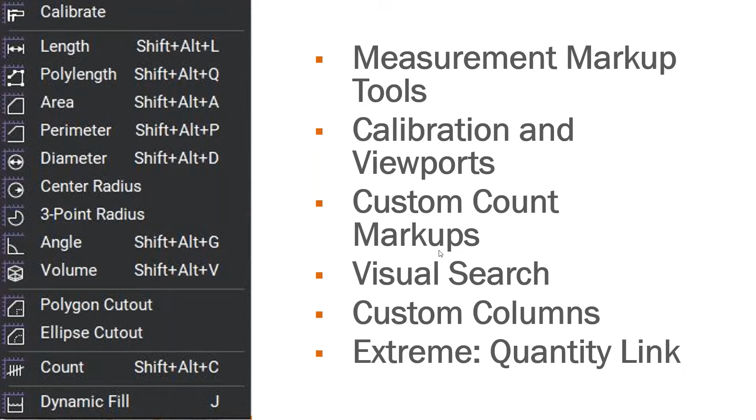Okay, so let's get right to it. I'm just going to use the out-of-the-box profile for Bluebeam. You can always customize a profile by going into the Revu pull-down under Profiles, and you can choose all different ones. I'm just going to go with the out-of-the-box one so that everyone is on the same page here. And within those profiles, you can have what's called a tool chest.

So we can make various different tools. I'm going to go ahead and make a new tool chest for this demonstration. And then I'm also going to go over what is in your markups list. Now, in the markups list, all the columns that you create get saved in the Bluebeam profile that you're going to be using.

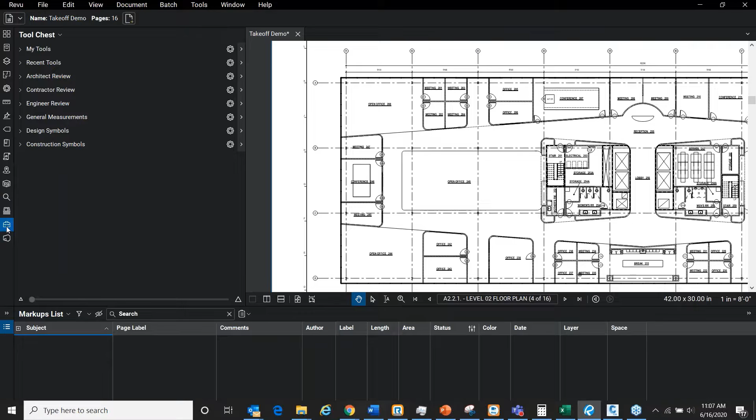So it doesn't get saved necessarily in the PDF, it gets saved in your profile, right? Same thing with the tool sets, those get saved. You can attach them to your profile as well, or you can load them up independently. Okay, so

the first thing I'd like to discuss is the scale of your PDF. Right, so there's a couple different ways to set it. A neat thing about 2019 is that if it's not already set, you can see that in the lower right-hand corner over here. If it's not already set, the moment you create a measurement markup, it's going to prompt you to calibrate the scale of your PDF page. Right? So you can see if I go to different sheets, they might have different scales on them.

And that was me lowering my markups list. Okay, so what we're going to want to do is in our markups list, we're going to want to create a bunch of measurements that we can sort and then quantify and then create a numerical, like a currency value for them, right? So we can see how much it cost to fill in these spaces, right?

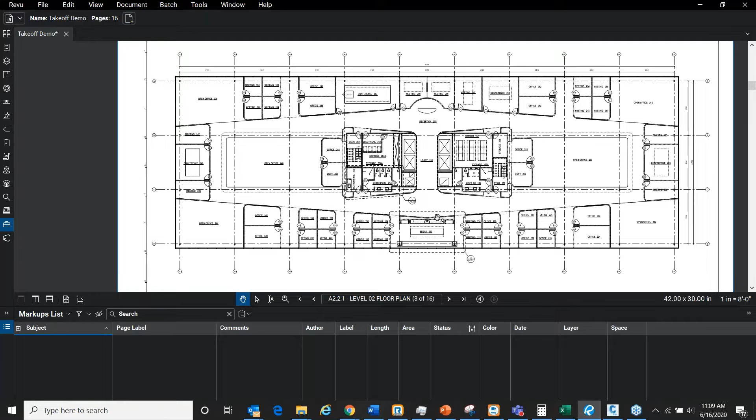So the first thing I want to do, of course, is to show you how to calibrate the page. Right now, this PDF itself does not have a written scale on it, so we're going to have to make an assumption here, and I'm just going to assume that the doorway width is 3 feet. Right.

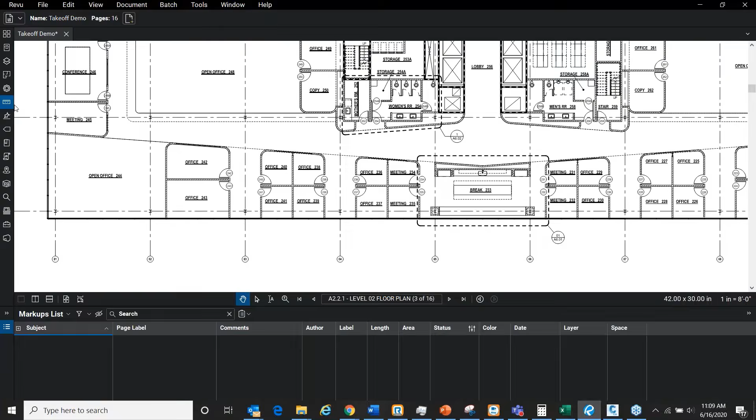So I can either click in the lower right-hand corner to change the scale, or I can go to my measurements panel, and I could choose to calibrate the scale. Now, this probably makes a little bit more sense because you have more options here. Right. So I can apply to the entire page range, as you can see in the pane here, the panel.

I'm going to choose to just set this to the current page. So it's going to be page 3. And then I can choose my precision. Right. So maybe I want it to be to every ½ inch, quarter inch, really depends on what you're trying to do. Right.

And you can either type in, 1 inch equals 8 feet, for example, or you can calibrate it, right, by clicking between 2 points, and the program is going to measure what that is, and then you can decide what it's supposed to be, right? So we can scale the PDF that way, but you can also choose what your default units are, right?

So I'm going to calibrate. I'm going to select 2 points that have a known dimension. So in this case, I'm just going to choose a doorway. So from this point to this point, notice that I'm snapping, right, to specific points in my PDF. The reason I can do that is because I have my content snap on, right? What the content snap does is it allows you to snap to any vector objects in your PDF.

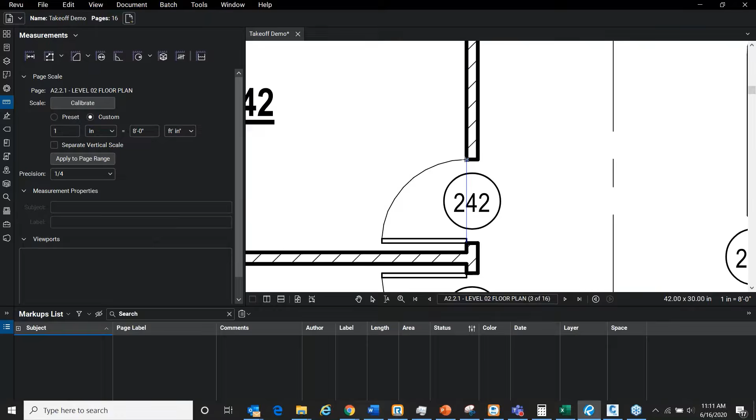Right, so it measured what that was in inches, right? So that's 0.3 whatever inches. And I'm assuming that this is 3 feet, 0 inches, right? So that's what I'm going to scale it out. I could either do decimal feet, right? I could just do it in inches or feet, inches, right? So let's do feet, inches, and it'll be precise to a 1/4 inch, right?

I'll be applying that scale to this page, right? So that once I do a measurement, snap from here to here, you'll see it measures it at 3 feet. Right. In my markups list, you see that there is a subject called length measurement, right? It tells you what page it's on. The comment tells you the measurement, who the author is, that's me.

And then you have all these other options here, right? So this tells you the length. This area is blank because it's not an area measurement. It tells you the color and the date, right? There's other things we could do. We could apply this to a layer, but we're not going to get into that right now.

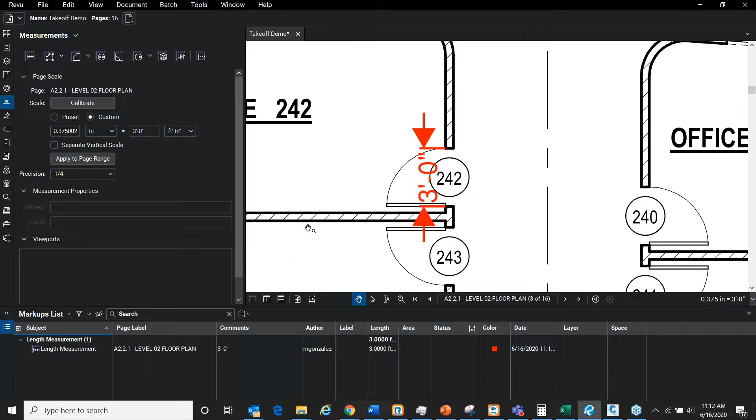What I want to do is I want to select this guy right here, right? Because we have a bunch of different options. Now, if you look at the top of your screen, right, we have these different properties. You can also go to the properties pane on the left side over here. That's the little gear where you can input a bunch of different properties. And this is true for all markups, not just your measurements.

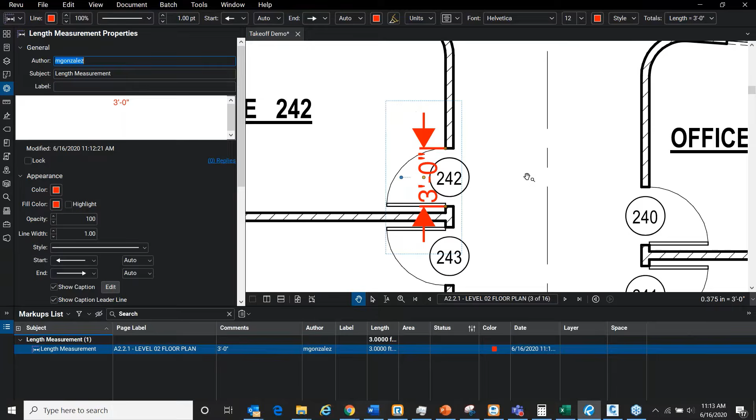So just for today's example, I'm going to do 2 examples. I'm not going to do the length because it's a little bit simple. I'm going to do areas and I'm going to do counts. Okay. So what we're going to want is to, let's say, assign some flooring to some of these offices, and we're going to want to count the fixtures that are in, let's say, the bathrooms, right? Just as an example of what you can do, and then we could tally them up and assign values for them, so we can automatically tally up as we go how much things cost.

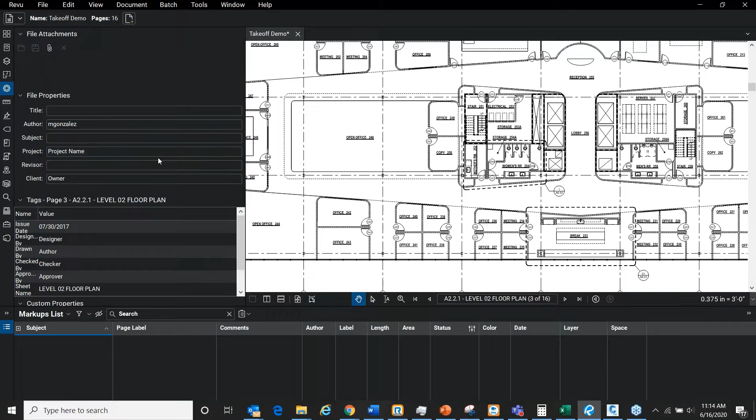Now, you can make this as complicated as you want. It really kind of depends on what you're trying to do. So the first thing I'm going to do is I'm going to create an area measurement here, right? It's going to measure this office 239, and we're going to make it appear the way I want it to. Okay, so that's the first thing I'm going to do. So I'm going to go under measurements. Now I could also go under tools, measure, area. Same thing as doing it over here. The scale has already been calibrated for the page, so we are set.

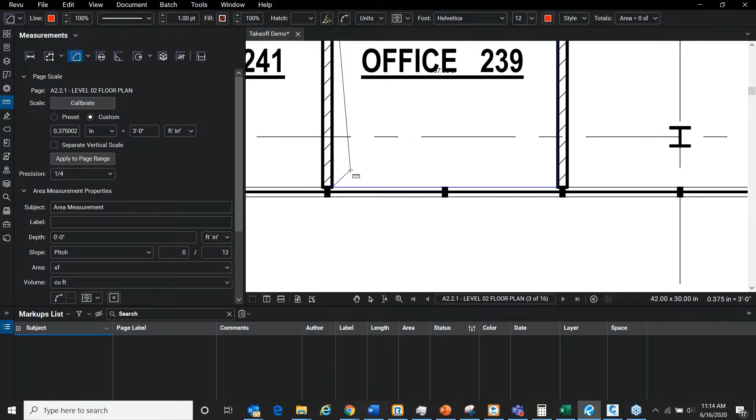I'm going to snap to this corner. I like to click all my vertices as opposed to just kind of dragging, and I press enter when I'm done. Right. So that has measured 97 square feet. And that's great. However, it's not really giving me any definition the way I want it to, or looking the way I want to differentiate it, right? So I'm going to select the markup I just made so that I can make a custom repeatable markup that measures area. So to do that, again, I can either have the pull-down menu or I can go into my properties.

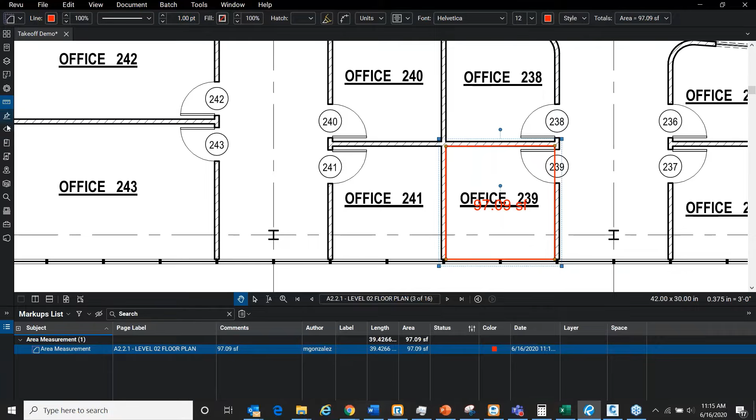So the first thing I'm going to do is I'm going to change the subject. All right, so I know that I'm going to make this space markup be for carpet. Okay. And let's say, for example, I want this color of the outside. Maybe I do want that to stay red, but I want there to be a fill color. It'll make it yellow, highlight it, so that if it's a highlight, you can see through it, right? I could choose what it shows. So I could show the caption, I can show the label, and the area.

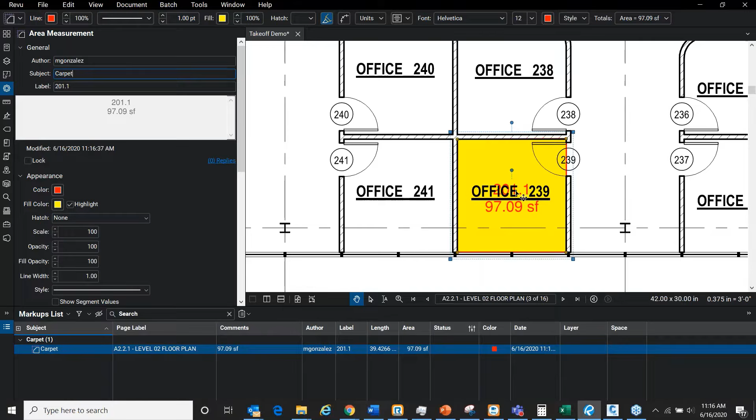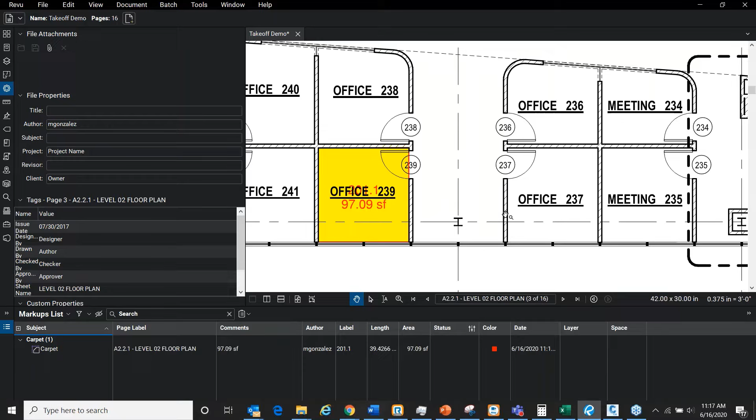So the label I can assign up here, right? So maybe I want to assign this to be a material number. So it would be maybe 201.1, okay, that's the number of the material, right? So that shows up there. And then the more information you could put in your particular markup, the better, because there's more information in your markups list. So I can make a bunch of different carpets, and they'll all show up under the subject carpet, even though they'll have different labels and they'll be different things.

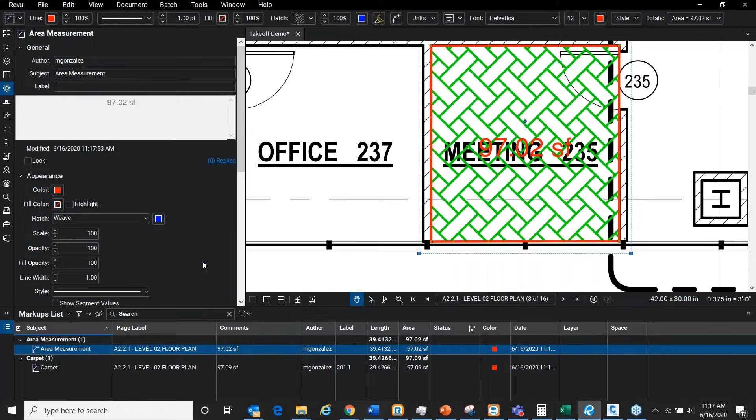So the next thing, I'm going to make another one as well, right? So I'm going to make another area measurement. And I'm going to go in this area over here just to make it nice and simple. But this time, I'm going to select this markup, and I'm going to make it look a little different. So I'm going to give it a hatch. Maybe this weave hatch, change the color of it to green. Oh, that's obnoxious. Go with blue. Also obnoxious, but that's okay. Then you can change the color of the text. So you can really customize these however you'd like.

Again, I will change the subject to be under carpet again. Now, notice that it is case sensitive. And maybe this is 201.2, because this is a patterned carpet. Now, to get these markups to be repeatable, let's go ahead and make a new tool chest that will contain these. So I can make a tool chest, manage tool sets. I don't know why they don't call it manage tool chests, but there it is.

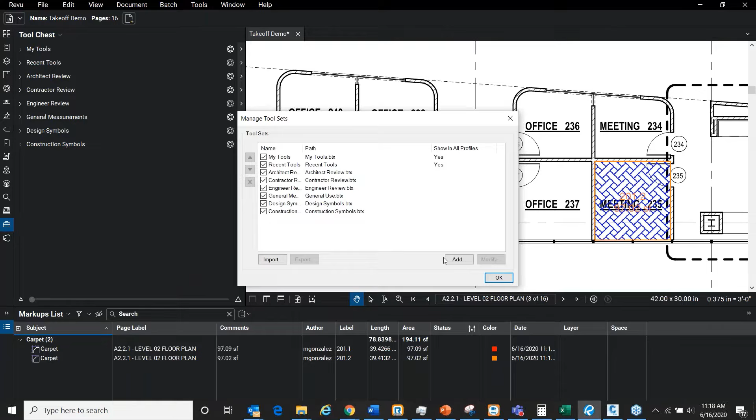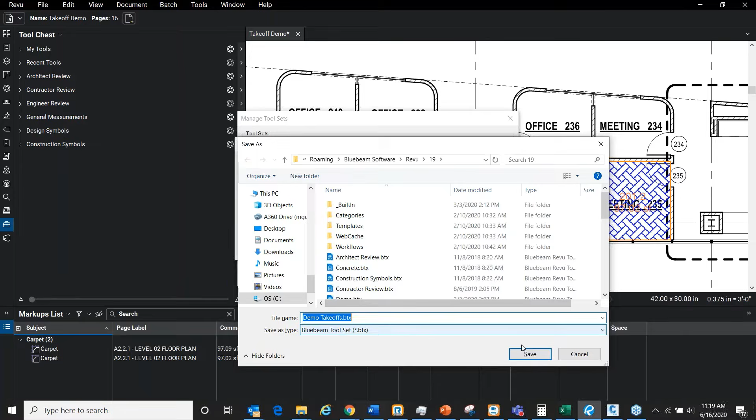I'm going to add a new one. And I'm just going to call them demo takeoffs. And it's going to save in your data, and it creates a BTX file, which you can assign to your profile, and you can have it show or not show. So here it's showing for us. You can import it, export it, whatever you need to do to reuse it. So you can make the entire tool chest, export it out, and then your users can import it and then use all the tools available with all the preset settings.

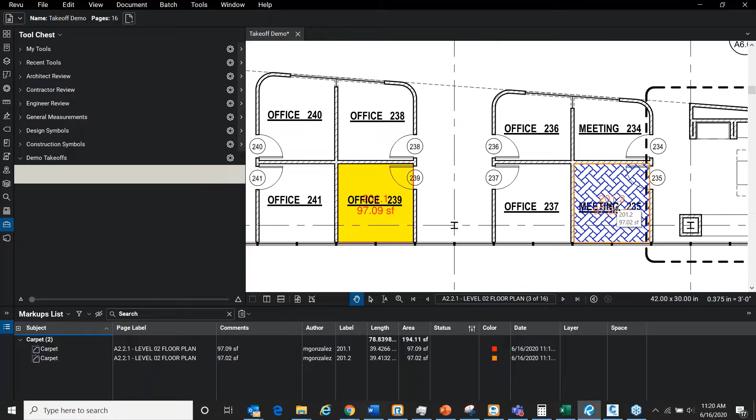So I haven't added anything to it yet, because there's a couple more things I want to specifically add to these markups to make them repeatable and useful for me. So to that end, I want to create a couple new columns that will demonstrate that. So I can make a choice: this markup is specifically for a solid carpet, whereas this markup is specifically for a patterned carpet. And they might have different prices.

So let me go into my markups list here, and I'm going to show you how to make a custom column. I'm going to make a custom column by going to Manage Columns, Custom Column, and I'm going to add a custom column. Now you can add a variety of different types of custom columns. In this example, I'm going to make a choice. This is the type of flooring. So the flooring, and it's a choice.

So I'm going to add the items. What are my choices here? Each item has to be unique. So if you assign it the subject carpet, you can only assign it a specific item if the subject matches. So I can't have something that's a different subject and assign it the same item that's under the flooring choice. So here I will choose solid. So it's a solid carpet.

And I'm going to assign it a numeric value. So maybe per square foot of carpet, a solid carpet would be, and again, I don't know at all how much by square footage, let's say it's $5.93 per square foot. And then I'm going to add another choice. So again, it's the same subject, it's carpet, but this time I'm making a patterned carpet. And we're going to assign that a value that's slightly higher because patterns are fancy. Let's say $6.28 per square foot. Again, maybe these values don't make any sense, but they're just values.

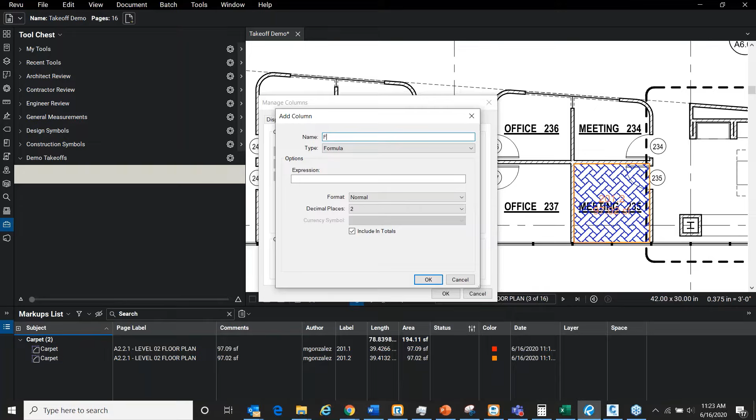Okay, so I can say okay to that. And now what I want to do is add another column that's going to actually give me a numeric value. So it's going to multiply the area times the value defined by the choice. So I'm going to add a new column, and this one's going to be a formula. So this is going to be flooring cost estimate.

And notice that there's no pull down, but the moment you start typing something, if I chose F, I can choose flooring, because it's going to choose from that subject type. Double click there. I'm going to choose to multiply that by the area, because these are all the different functions and variables you can choose. So this is going to choose the area measurement of the flooring choice. I can choose to have that in currency, in 2 decimal places.

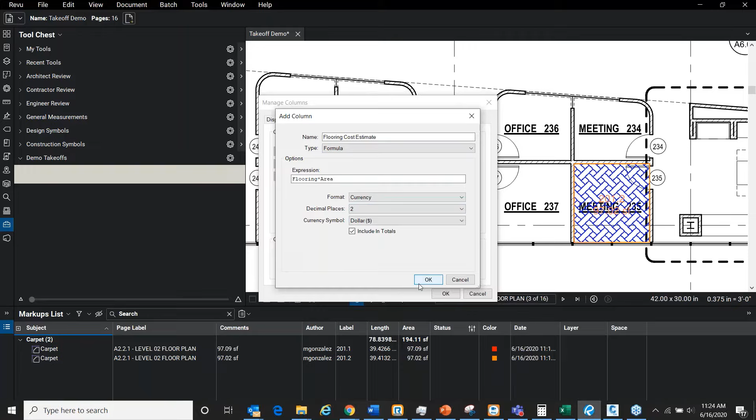Okay. So now, notice we have flooring and flooring cost estimate available to us in our markups list. Right now, I haven't assigned these to be either, so I can select this guy right here. And in the properties panel, I could scroll down, and because it has the same subject as the choice that I created under my flooring column, I can select either solid or pattern, or I could do that here.

So I'm going to select solid in my properties for this one, and notice it shows you the per value, and then it's showing you the total cost by the area. So 97 times 5.93 gives you that. I can do the same by selecting my patterned, and I can choose pattern, and that way it's going to automatically assign it there. So we have differentiating in type of flooring.

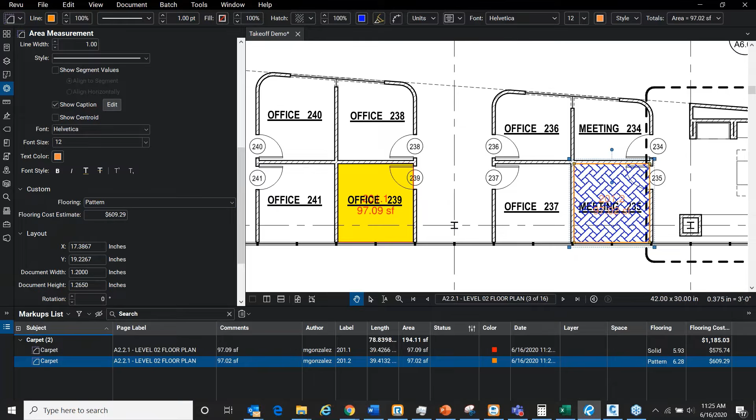But notice that we have a running total for carpet as the subject, because it keeps it all under one header. So you could do different types, if you're doing hardwood, tile. Those could all be different subjects, still using the flooring choice. You just give them different items and subjects. So you can just build it out as much as you need to. And you can do that with lengths, walls, all different sorts of ideas.

So the way I can make this repeatable is that if I go to my tool chest, and I made a new one, this has all the properties I want. It looks like how I want. It's displaying how I want. This is showing me the material number.

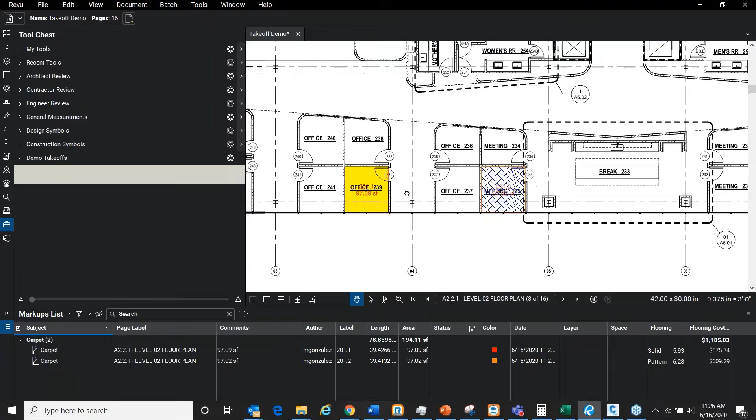So solid carpets are material number 201.1, right? Whereas pattern carpets are 201.2, for example. And if you have a whole list, you can make them match up however you want, right? So I can select my markup that is now all set up how I want it to be. I can right-click on it and I can add it to a tool chest.

So for this example, demo takeoffs, right? And I'm going to do the same thing. I'll press escape, do the same thing with this guy right here. Add to tool chest, demo takeoffs. Right now, if I click on them, they're going to make the exact same thing. I'd have to right-click and change it from there to there, right? Choose properties mode, and that way, it'll just maintain all the same properties, but I can just click, right? And have it fill in.

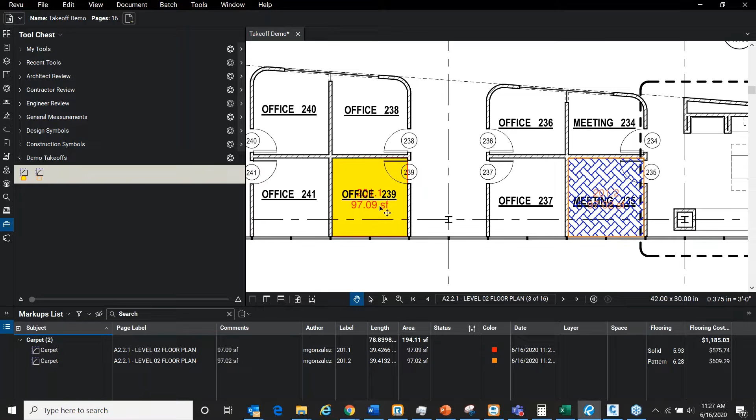So for example, if this Office 237, I also wanted to have the same carpeting as the office right next to it, seems only fair. Right. So it's all the same properties. Notice that it's down here, right? Patterned, right? And it still just tallies it up as we go. So you can just start filling in all the different rooms how you want, right? All your different spaces, however you need to.

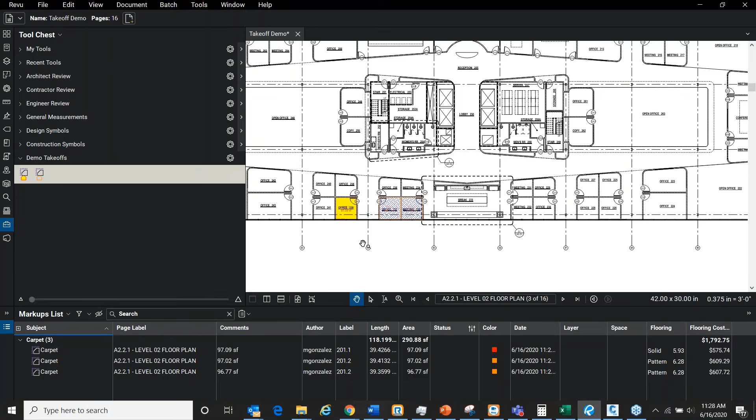With different flooring types, and it really takes a little bit of setup, but the accuracy you get by snapping and filling it in this way is really useful. Notice that we have some weird curves over here that might be a bit frustrating, right? To just kind of make the curves and all these weird angles and things like that. So one thing I want to show you is the dynamic fill function.

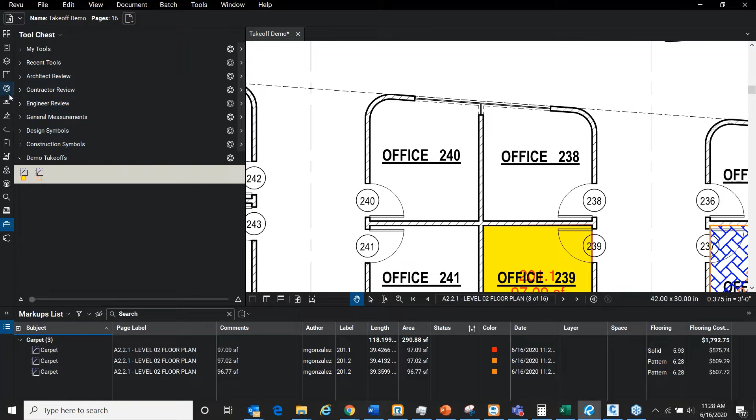Okay, so if I go into my measurements tab, this button all the way over here called dynamic fill, that's going to allow us to choose oddly shaped areas that we can define using a particular markup. So again, we're already calibrated, so I'm going to click on dynamic fill, and I get this nice little toolbar. So I can define in two ways. I can add a boundary, which I'm going to need to.

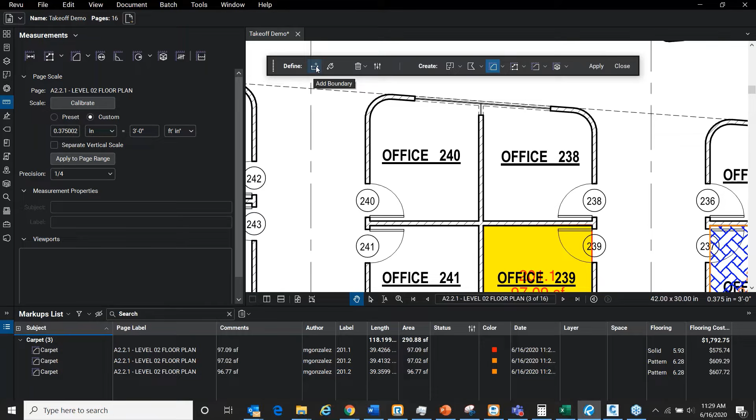So let's say over here, I want to close this doorway. So I can add a boundary by selecting this icon on the left. And again, I'll snap to this corner and close it off over here. Press enter, and that way it'll close it off. I can also change the boundary sizes, right? That was a little bit big. So maybe I'll go ahead and I can remove that, and I can redefine it just by clicking. So you can change the different sizes and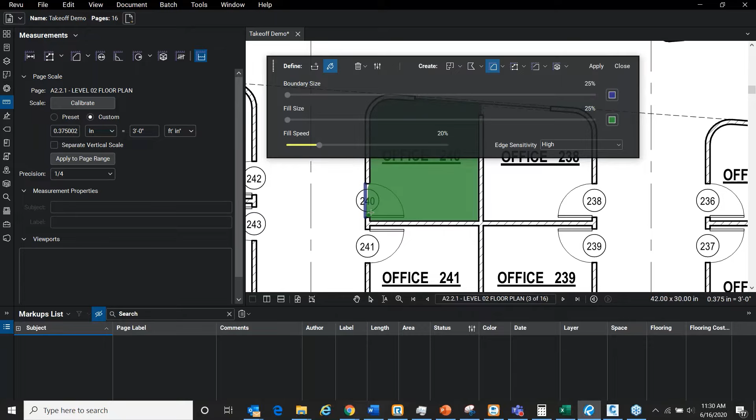widths of things, right? So the next thing I'm going to want to do is define the space by filling it in, and this is kind of the neat part. And maybe I'll change my fill size to maybe a little bit smaller. So notice that it got in all the little nooks and crannies, right? Without me having to click a bunch of times, make a bunch of weird curves and things like that.

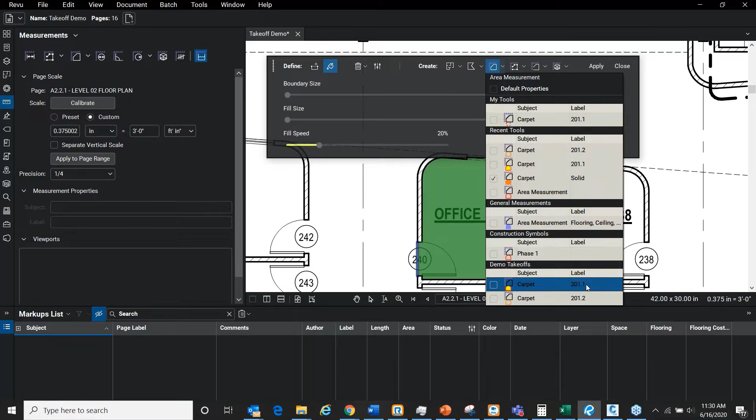And then what I could do is I have the area measurements, and I can go to any one of my tool chests and choose what I want it to be. So I want this to be a solid carpet. So I can see the label, 201.1, that's the solid carpet. So I'm going to assign that here, and I can just apply it. And see how it just got me my area, and it added it to my running tally of carpet, because again, it's all the same subject. Okay.

One other thing I want to show you regarding dynamic fill, because you could do it with a variety of different lengths. So if I did a fill and just wanted to measure the outer length, I would use a poly length measurement, and it would give me the outside measurement. So it's really just kind of a bunch of different options.

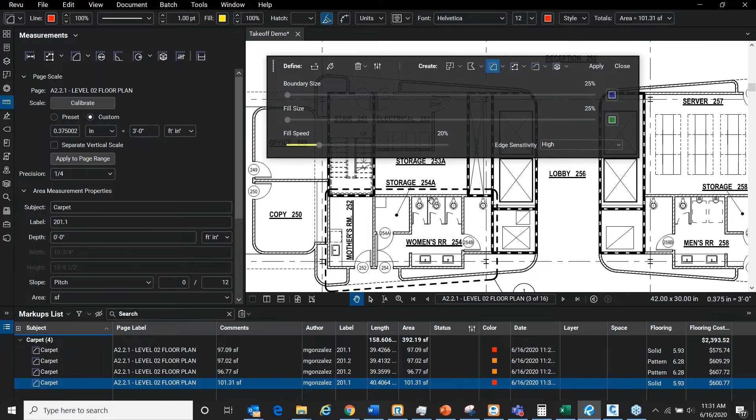One thing I want to do, especially because we're going to be using the count measurement, I want to be able to differentiate which toilets and sinks are in the women's room versus the men's room, without having to do a different layer to display them. I'm going to use what's called a space. So I'm going to create a space, and I'll call this the men's room.

And I'm going to fill in this area. So I'm going to give it a boundary from here to here. Now fill in the men's room. And you can just kind of hold it down and notice it stops over here and over here. So I'm going to fill that in, fill this in, and then scroll over here and just kind of fill this in as well.

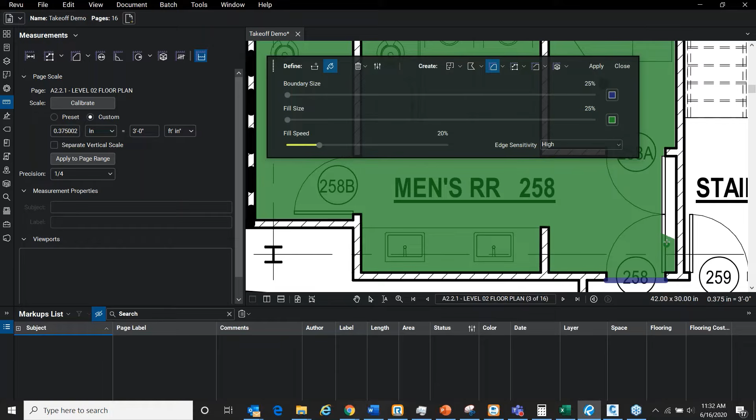So you can just kind of paint the area you want it to fill. So anywhere that's enclosed, you will fill it. So maybe this closet too. So everything inside of here is in the men's room. So I'm going to make it a space.

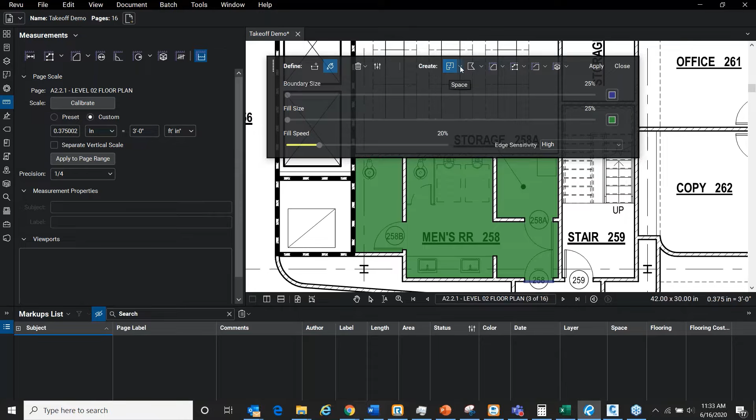Yeah. Apply that. Got to check it on. I'm going to uncheck the area measure by declicking it because I don't necessarily want to measure that area just for the time being. I could if I had a different flooring type that I wanted to apply. But right now I only want to apply a space, and it's going to be the men's room. So I'm going to apply, and it's going to create a space. Notice that it's a different color.

All right. I'm going to do the same thing over here in the women's room. But I'm going to change the color. Maybe make that whatever color that was. Same thing. I will apply a boundary to the door. Okay, and then I'll just fill in over there and over here too.

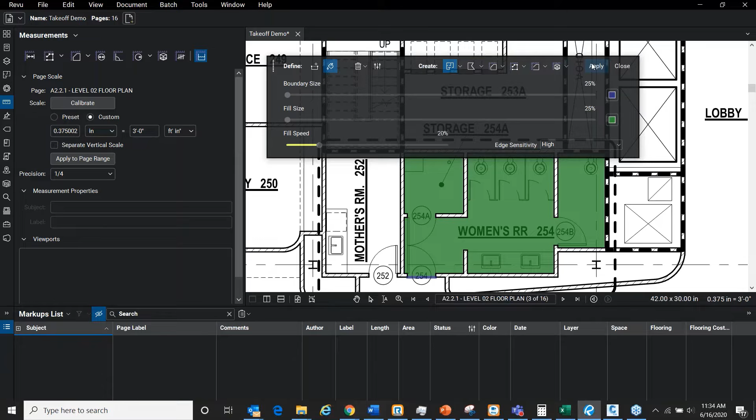Okay. All right. So it's set to create a women's room space. It's checked on, and I can apply. So it created women's room. There's the men's room. All right. So that's how the dynamic fill works. You're going to choose a different measurement type markup, define the space by filling it in, closing off the boundary, and creating the markup or space that you wish to define.

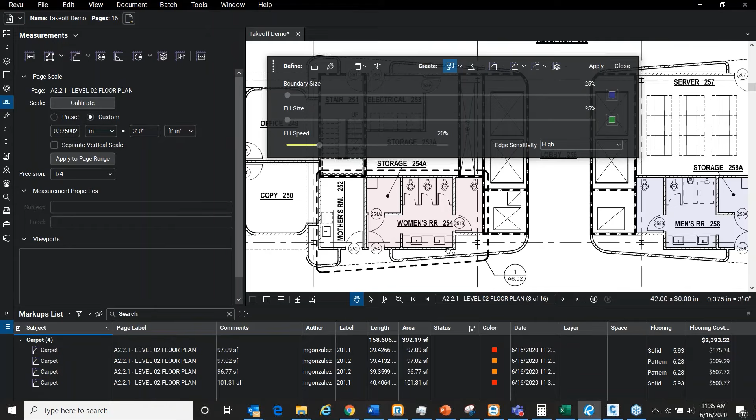Very useful, especially if you have a bunch of weird angles or curves that you don't want to manually input. So I've done that. I can close. So we're starting to build this thing up nicely. These aren't in either of the spaces, so they're not assigned to it. So let's go ahead and do what I was mentioning, and that's counting the different toilets and sinks.

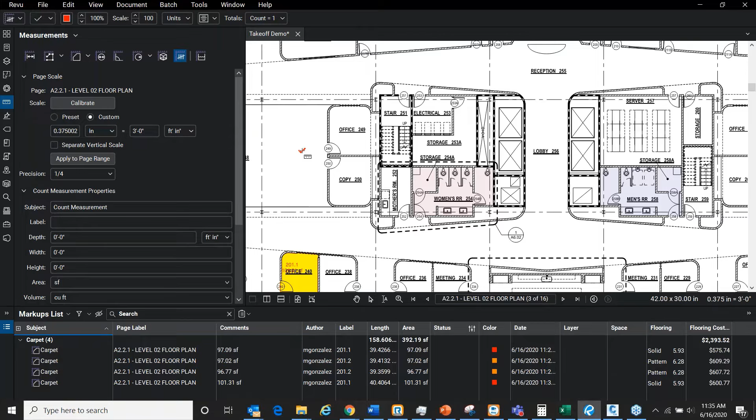So I'm going to create what's called a count markup, and now I'm just going to do it quickly using the default count markup, and then I'm going to change its properties. However, you can always either draw in your own markups, let's say like a line or something like that, or you can bring in a little image if you want and use that. So, for example, if I chose an image, just place that there, just that little guy. I can actually apply it and use it as a count.

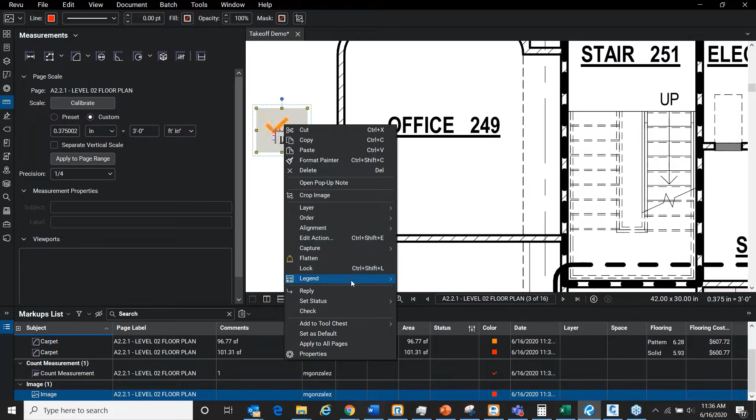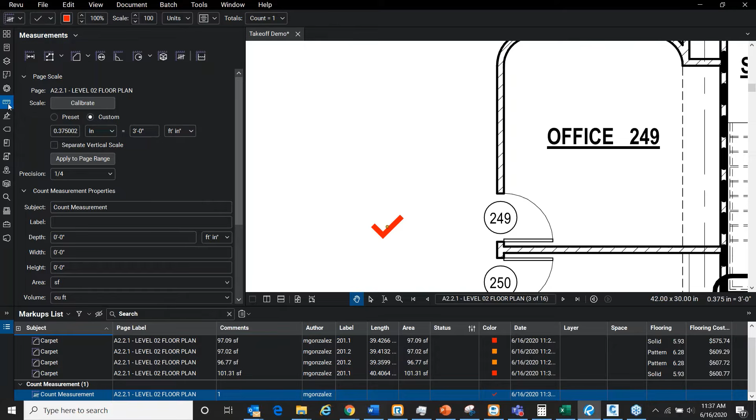So once I create more counts, I can show you how to do that. So let's say, for example, this count measurement. I'm going to remove this for the time being. This count measurement, so it's a count. I'm going to go into my properties here. And this time, I'm going to make my subject for these different counts a fixture. And I'm going to make new columns. So I'm going to call this fixtures.

And then let's say the number is 202.1 for toilets. And then I'll make the other one 202.2 for sinks. So I need to make the columns first so I can assign values. So again, I'm going to go to markups, list, manage columns. I'm going to make a couple new columns. So this one will be fixtures as opposed to flooring. I'm going to again make it a choice. And I'm going to add the item being toilets under the subject, fixtures.

Oh, and I forgot to assign it a number. So each toilet, for example, let's say it costs $125.75. Again, no idea if that's a reasonable number. And then I'm going to add another one. So this one will be sinks. So this again will be under the fixtures subject. Again, I keep on forgetting to assign the value. There it is, 78.68. So I've added those two right there.

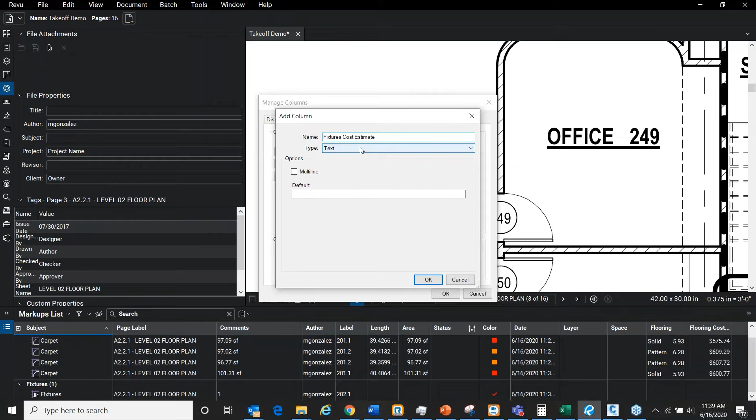So fixtures is the name of my choice. So I could add another column. Fixtures cost estimate. And it's a formula again. So it'll be under fixtures instead of flooring. Multiply it by the count, because we're doing per unit. We do currency, keep the decimal places at 2. Cool. Include it in the totals.

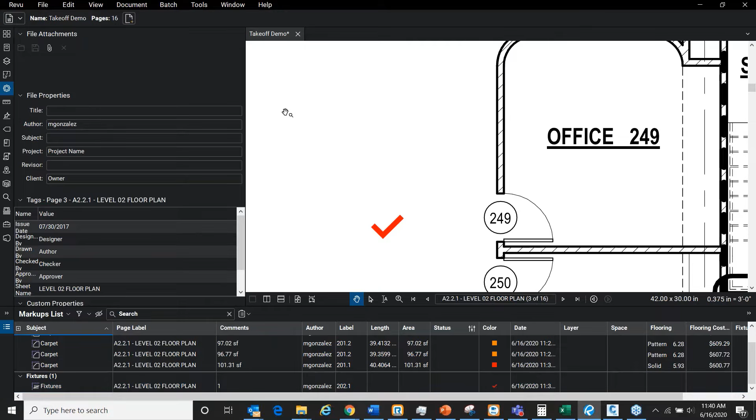Okay. So then I can go choose this count. I can change what it is, or I can choose whichever count type I want to use. So again, if I brought in an image, just place that right there. If I change the subject to fixtures, maybe this one.

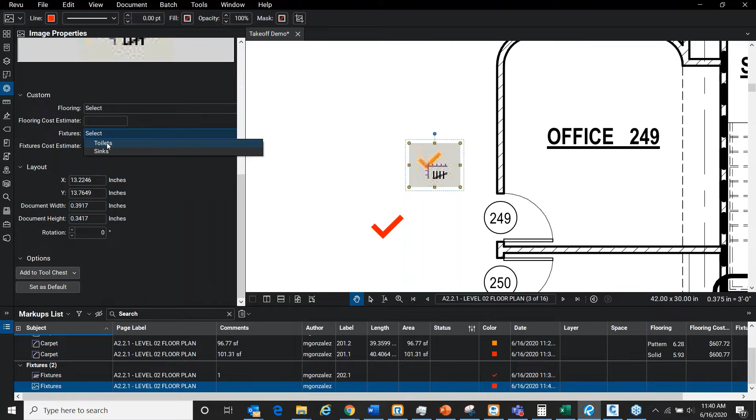Notice that because I changed the subject to fixtures, I can't choose the flooring because that would require the subject carpet. So let's say this one is for toilets. And I could change the color if it was just a regular one. But this, since it's an image, that's what it's going to be. Let's see, and I could add this as a count.

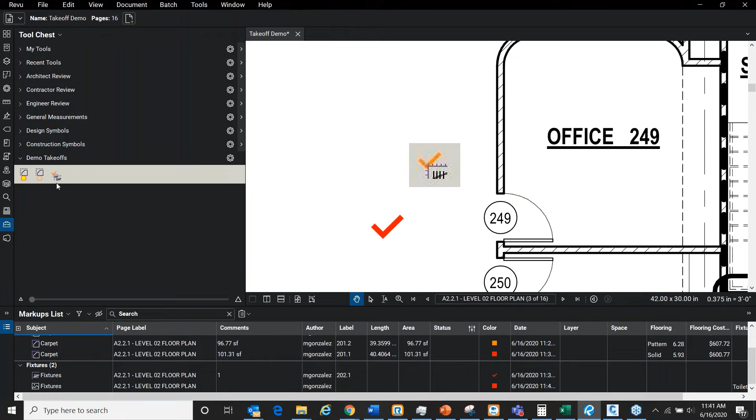Right. There it is. I have to add it to my tool chest, and then I can create a count. So I can remove the original image, and here I have a count measurement that's ready to go. So I can delete this.

And I can further assign properties if I wanted to this count measurement. So now it's a different one, so I've got to rechange it. So I'm going to go back to fixtures and reassign it as toilets.

So just FYI, if you create a count, and you click one and then you realize, oh, I've only clicked one and I want to continue, I could resume the count and keep on clicking.

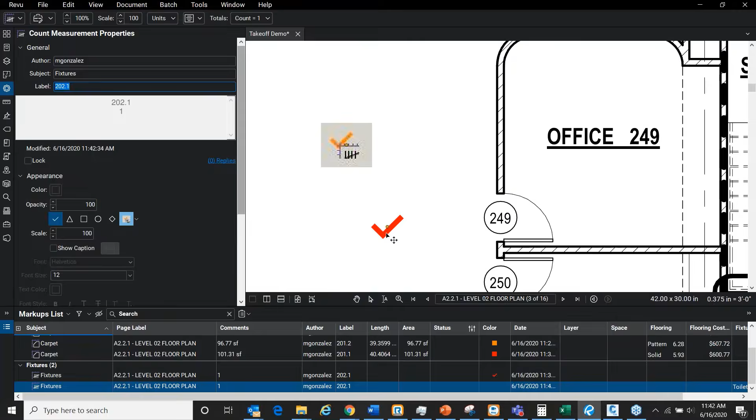So I'm going to go ahead and change the label so that it's the material number. So it's 202.1. And I wanted to change this one to 202.2 so I can assign it to be a sink. So this is 202.2, this is 202.1.

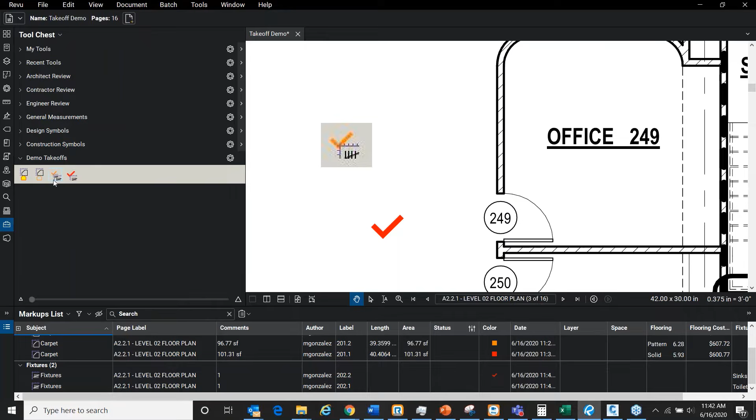So I'm going to add this to my tool chest. I'm going to remove this one again, delete it from there, and now that I changed the properties of it, I'm going to add it back to my tool chest. So I'm going to delete this for now, and delete this one for now.

And so what I'm going to do is, I want to automatically search in my PDF for all toilets on this particular page. So to do that, I can go to my search. And there's two things you could do. You could do a text search or a visual search. And I'm going to show you the visual search here because it's pretty neat.

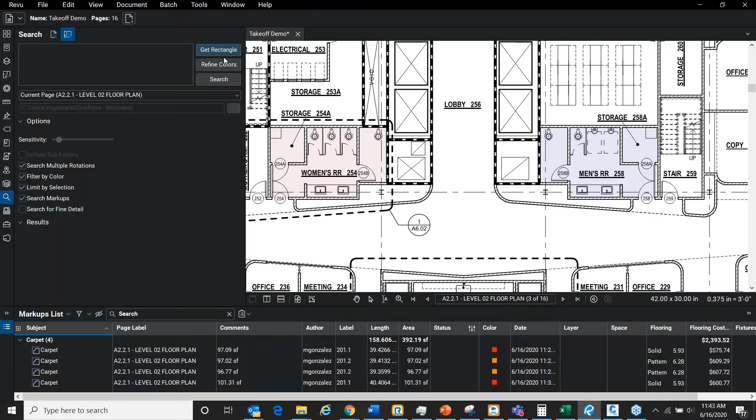So I'm going to choose the current page. You can do the entire document if you want, but I'm just going to go for the current page here. Now I'm going to choose Get Rectangle in my visual search. I'm going to zoom up over here. And I'm going to find that.

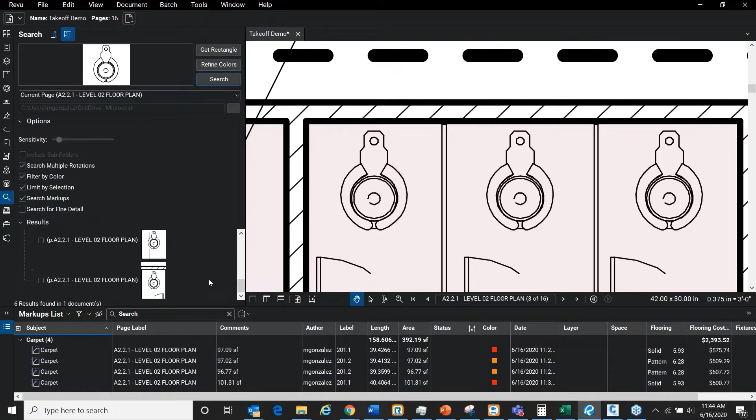So it's pretty good at knowing that it could be in any direction, any color. So you can change the sensitivity and search for multiple rotations, so it could be looking in different directions. So lots of different things you could do. So I could search. Notice that down here, it's searching this particular page. Again, I could have gone to the entire document and see how it's going down there.

So I can choose all of those instances, because if I click on one, it's going to go find it. So I'm going to choose all of those instances, and I'm going to apply by choosing that little lightning bolt with a down arrow. I'm going to choose this 202.1 because I know that is my toilets. And I applied a count measurement for all of those.

So if I scroll down here, notice that it found 6 total, but now it's split it up. So we have fixtures here, because it knows that these 4 are in the women's room and these 2 are in the men's room. So it was able to differentiate that while still keeping the running tally because it's still all under the fixtures subject.

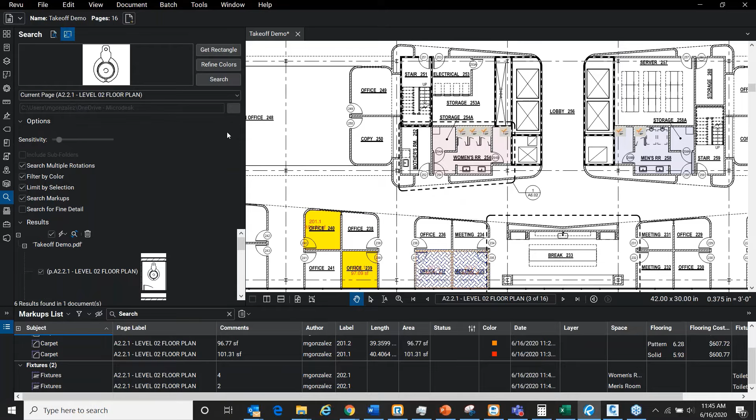Again, I could do the same thing, but this time I want to do it with sinks. So hopefully it'll find it even with that line through it. Okay, so I found a few sinks. See how they're rotated, not having a line through them. So I'm going to find that, and I'm going to choose Apply.

This time I'm going to use 202.2. And I found that one there as well. That's not in the space. So again, I can scroll down. So I found the one that's not in a particular space, if you wanted to put all spaces.

Again, it's differentiated them. It tells you how many there are in each one of these areas. But again, it keeps a running tally for all fixtures, just as we had a running tally for all carpets.

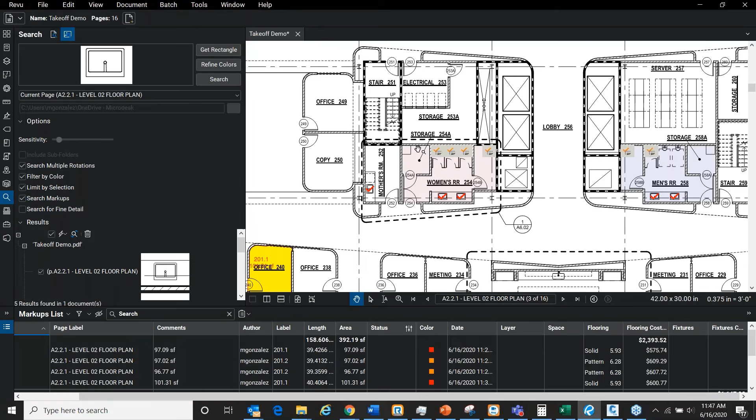Right. So that's kind of the way you can, in your markups list, keep a running tally going. And so again, if you just assign this tool chest to one of your guys to just start marking up a PDF, so long as they calibrate it, this is available for any level of review, right? So long as you just set that up beforehand, and you can set up your profile, your tool sets, and anyone could just start marking it up, and it'll just start a running tally in your markups.

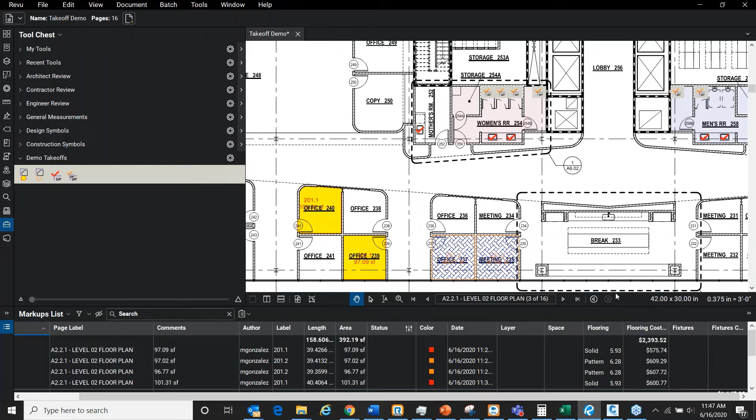So you could have a takeoffs profile that has your different tool chests for different groups, maybe. So you could have your mechanical group having different counts and tools. Maybe they're doing pipes or ducts, and they have different markups for ducts, and you've just set up your different columns to note that. So this is where you can set up your markups list to make it do whatever it is that you need it to do.

And I understand that it can get a little bit unwieldy with all the different columns, but if you need to organize it a bit better, you can always export it as a CSV summary to Excel, and then you can manipulate it there. All right, so I'm going to save, just so I can show you the final thing I want to go over today. Let me bring this back down. And this is again just for Revu eXtreme, so not everyone might have this.

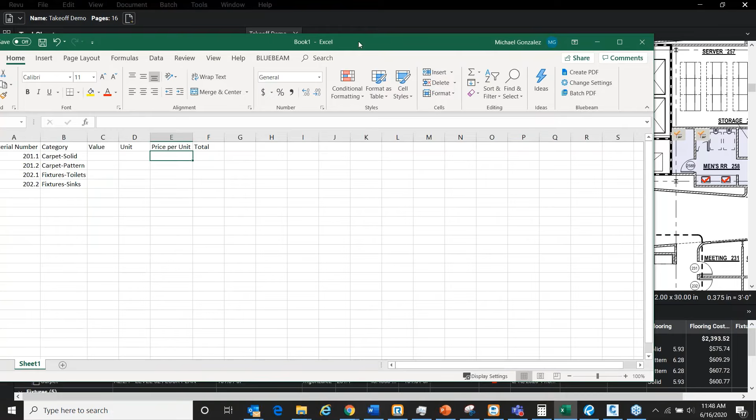So let's say I have material number 201.1. That's the carpet solid. 201.2, that's the pattern. So I can actually assign different columns, so different measurements from the PDF itself. I can assign a quantity link rather. I'm going to create one. So let's say I go for area of carpets, and specifically for solids. So I can break it down that way. I had already linked this Excel spreadsheet. So when you first click on it and choose create, it's going to ask you to find the PDF, which I already assigned.

So this is going to be the value of the area of the carpets that are solid. So that's the total running value, as we can see here. So all the 201.1, we have two of them. We have 97 plus 101.

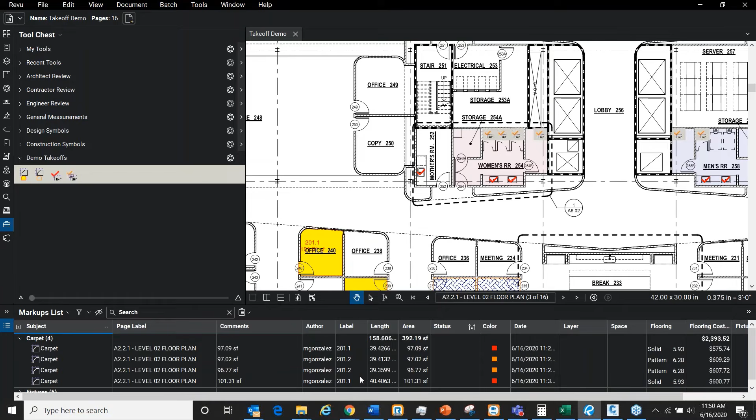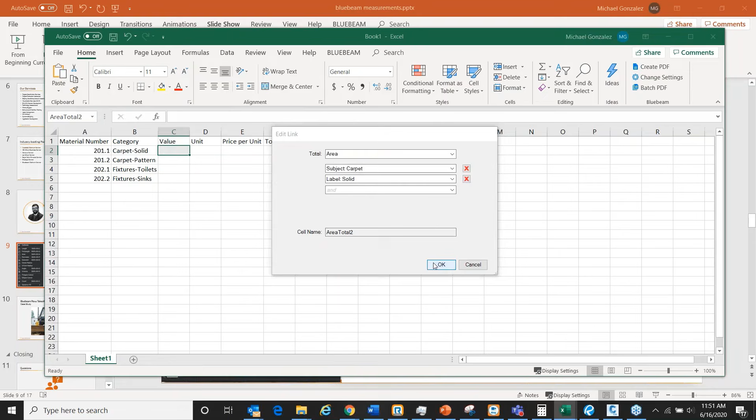Oh, you know what? I think it might be going to another one. Let's go with source files. It was going to my, so I'm going to remove that. Go to my current one. Okay, there it is. Let me delete that. Okay. I'm going to create. There we go. So now I've chosen my current PDF. Subject is carpet, and the label is 201.1. So this is the area value of the carpets in that file. So great, that actually adds up.

I'm going to do the same thing. The area of subject carpet, label 201.2. So that's giving me the area. Then I can do similar over here, create, for fixtures. So this time I'm going to do count of subject fixtures, label 202.1. That's the toilets. Count, subject fixtures, label 202.2. And then you can create your spreadsheets and fill it out as you go.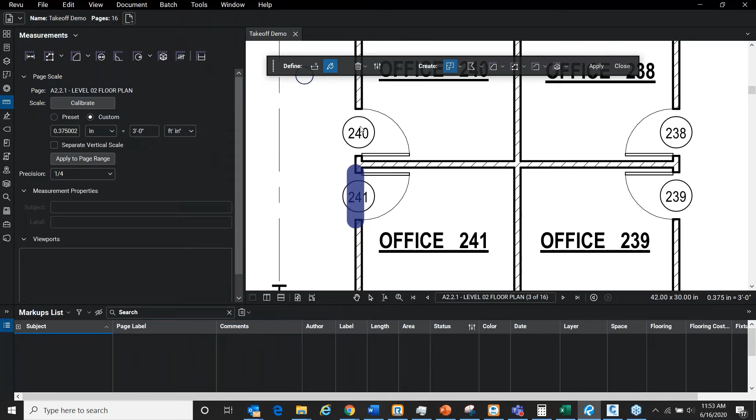Note, however, that it is actually live to my PDF. So if I go ahead and do another dynamic fill here, close this off, and I fill in this office. I'm going to uncheck space, and I'm going to check on area measurement, and I'll do that as another solid. I could apply that. It added that, so now we should see that updated. It used to be 100 something, now it's 200 something. So it updates automatically so long as it's linked to your current PDF. Close that.

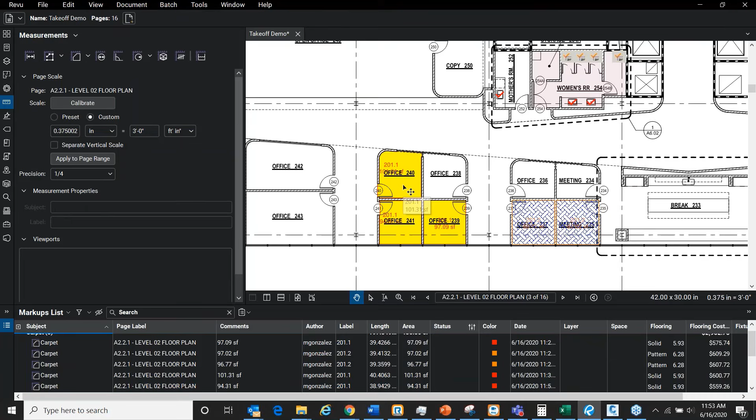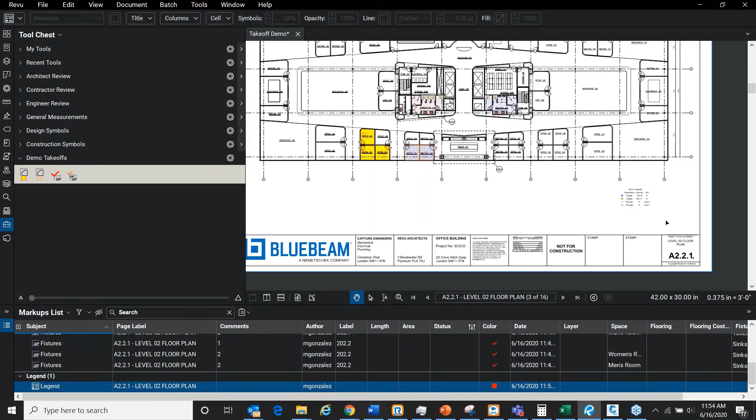One last thing I'm just going to show you here is I'm going to create a live legend. I'm going to create a new legend. And actually, I could do that from the tool chests. So for every tool that's in my tool chest, I can create a legend. So from this demo takeoffs, maybe you have a particular tool chest that you want to use, and each gives a little preview of what it is: the description, the quantity, and the unit.

And it's live. So again, if I fill in another office space here, let's say with the pattern carpet, right now it is 193.79.

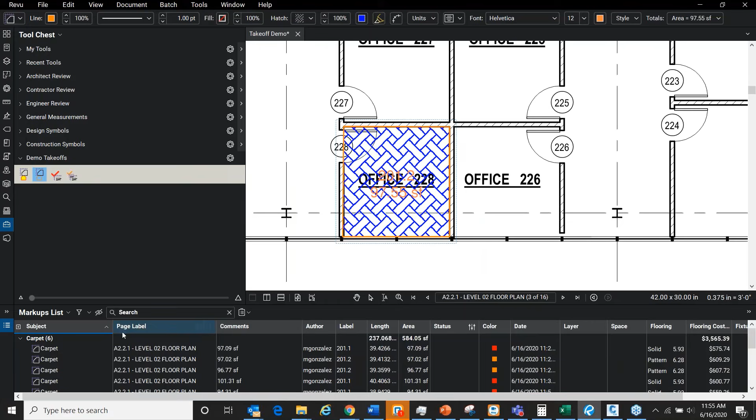Right? It adds it up, right? Again, it's tallying it up in my markups list, right? And it added it to my legend, right? And it added it to my Excel spreadsheet, right?

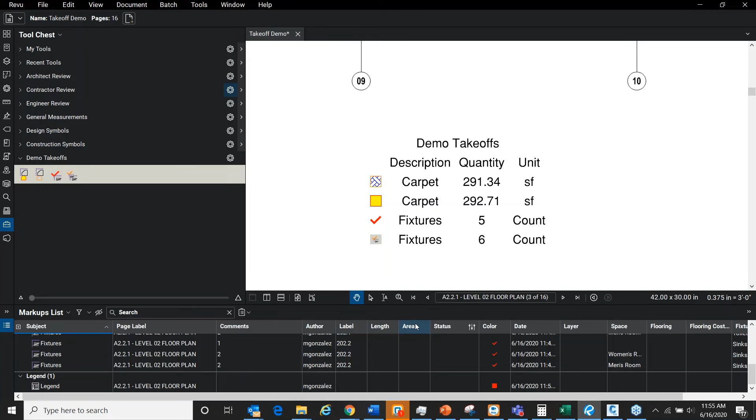So if you find that maybe doing your markups in here and then exporting it out and reorganizing it, and because once you export it out, it's kind of just once, it doesn't update automatically. So if you have people going back and forth, then maybe you find that the quantity link is really helpful if you're making constant updates to your materials list, right?

Right, so this is just an example of a workflow you can do to keep track of all of your markups and keep track of all your quantities, and then multiply them by the unit cost as defined in your choice.

All right. There's a case study performed about this from Bluebeam that we're going to show you guys just to kind of emphasize the value that Bluebeam can bring. Right. So let me go ahead and show this to you guys. All right, just 3 minutes.

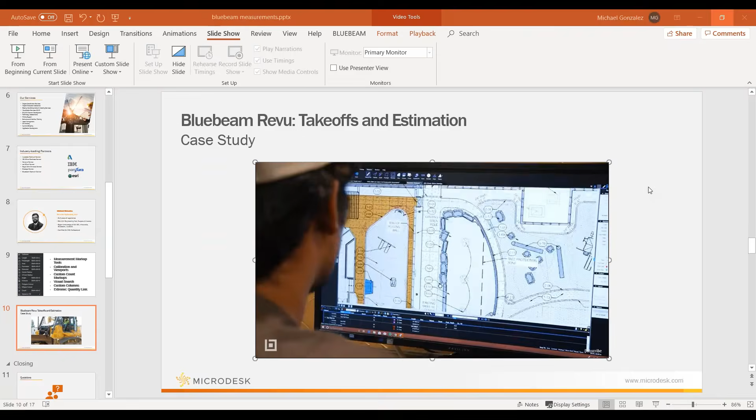Mike, I don't think the sound is working. Ooh. No one can hear it? Okay. All right. If no one could hear it, then I guess it wasn't worthwhile.

But basically, just by it being so accurate and keeping track, you don't lose track of things. And they found a $50,000 mistake right off the bat, and it saved them a bunch of time. That is essentially what was going on there.

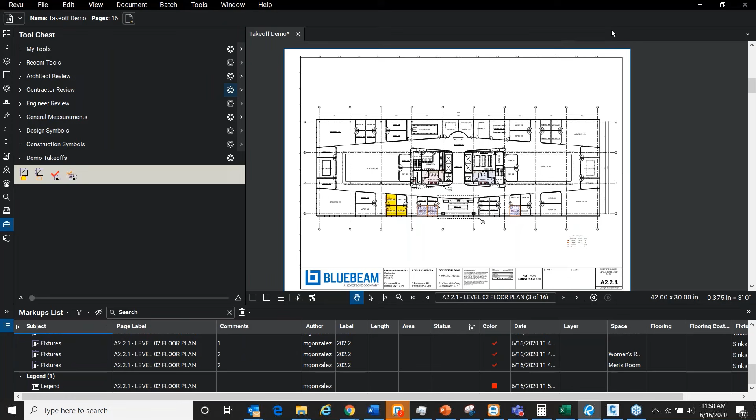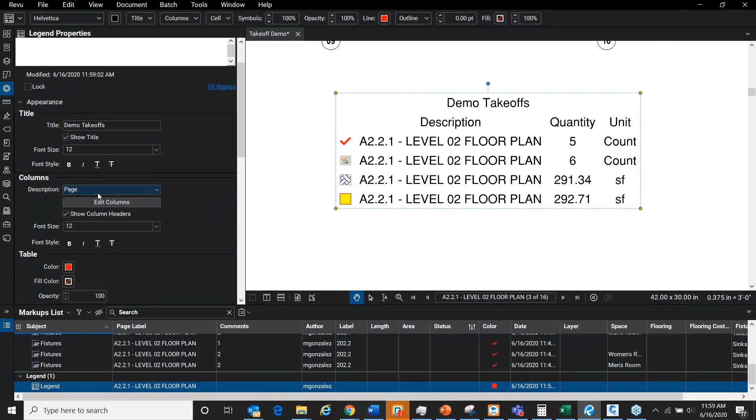But Rose asked, is there a way that you could show the fixture type in your legend? The fixture type. Oh, so yes. That's because it's in the description. So I think there's different ways that we can set our properties of the legend. Now you can go ahead and do different things. Right. So we can either add different columns, right? So I can show what page it is.

So instead of, so I can choose, let's see. So right now it's just the subject, right? But there's different things we can add. Right, let me just see the layout. So you can edit the columns, right? So choose which ones you want to show, right? So you can add a bunch of different, right? So right now we just have description, right? So maybe we want to do also,

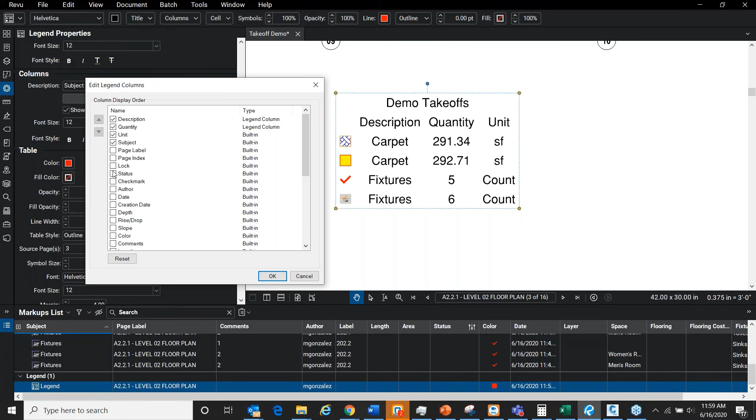if you had them on different layers, right? So I was going to throw in a bunch of them just to kind of see. But yeah, so it takes a little bit of playing around and how you organize, maybe you do a different subject for each type, depends on what you're trying to do. But you can edit the columns for sure to show what's actually shown there.

Right, so if I chose the different flooring or fixtures, right, that's going to show me whether it's pattern or solid, what choice was made, right? So you can show that column and what it is, right? And you can put the different lines and stuff, right? Grid lines and whatever. Did that answer the question?

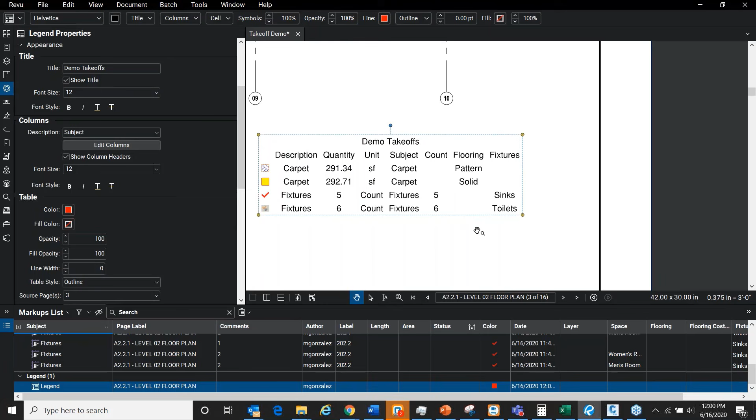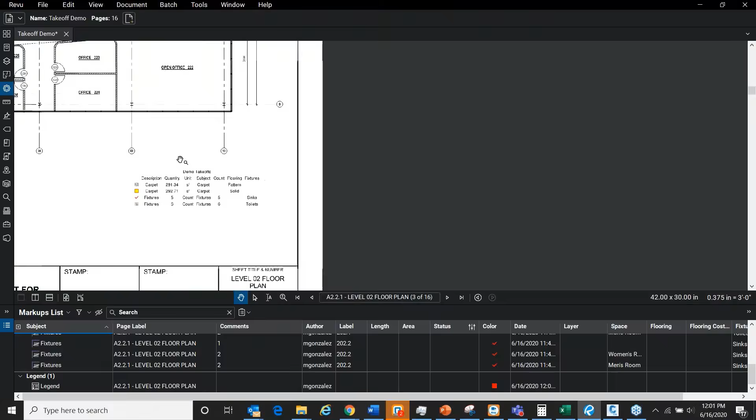But we did have one question by Philip. My company prefers that we do our takeoffs by room rather than materials. Is setting spaces on the drawings the best way to do this? Mike, is that something you think you can answer quickly, or do you prefer to just reach out to Philip?

Oh, Spaces is a great tool. If that's how you want to organize this, by room, Spaces is a fantastic way to do it. You just have to realize that you have to organize, either if you do it in Excel or if you do a legend, how you want to display it. So that might take a little bit of playing around when you want to get your final report out. But definitely everything will be assigned by space, and you can actually sort by what space they're in, which is useful.